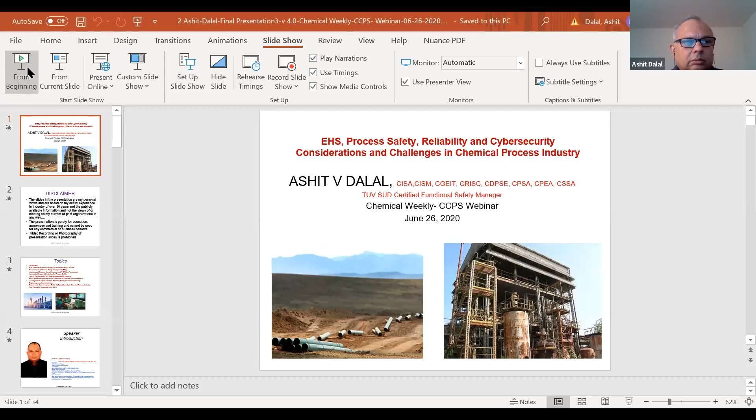I'm very delighted to present this for one reason, basically it's a kind of something we are giving back to the society and industry. And also I'm getting together with my old friends and colleagues and classmates. Deepak, Anil, myself are from the same batch, and Ravi was a little junior, but he's way ahead when it comes to business acumen and other things.

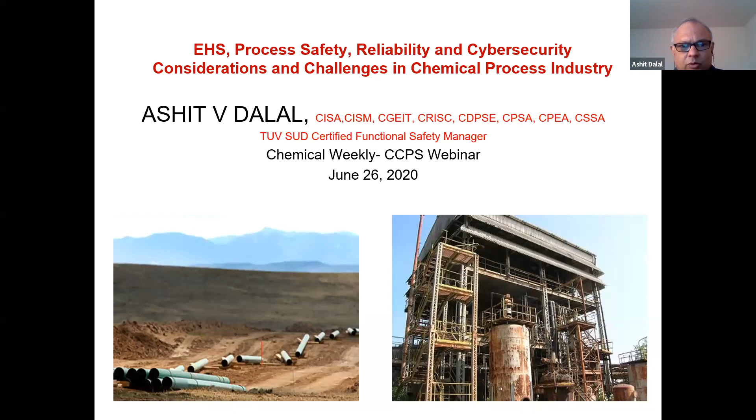So thank you nevertheless. This is a very critical and important topic. So we decided that we would give whatever we know and share our knowledge and experience, and at the same time learn from you guys, because there are a lot of people who have joined with a tremendous amount of experience. So I'm just going to go quickly and talk about some of the important aspects.

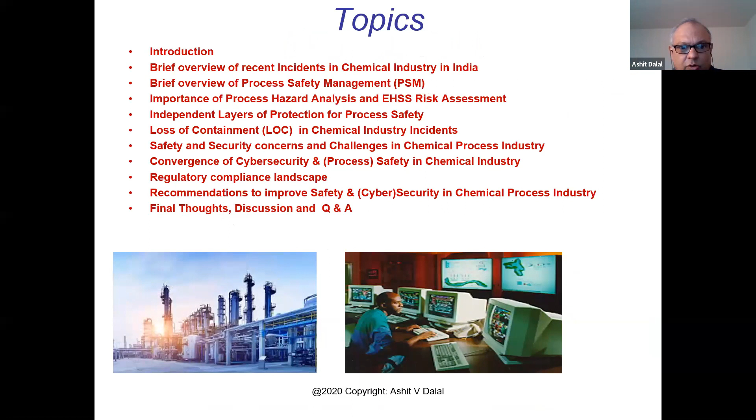So this is a little bit of my introduction, which you already know. I have a degree in chemical engineering and an MBA. I'm a gold medalist from Jamnalal Bajaj, and all those certifications you're seeing are all active. Almost 25, 30 years in industry, as Ravi has already said.

So when we started this, I think, sorry, I'll go back. This is Bhopal. Everyone knows what happened on the fateful night of December 3rd, 1984. Largest environmental tragedy in the history of the chemical industry, and it impacted so many people. 2,800 people died, with permanent damage to several others, and just $350 million was the kind of damage estimated at that time. In today's value, it would be much more.

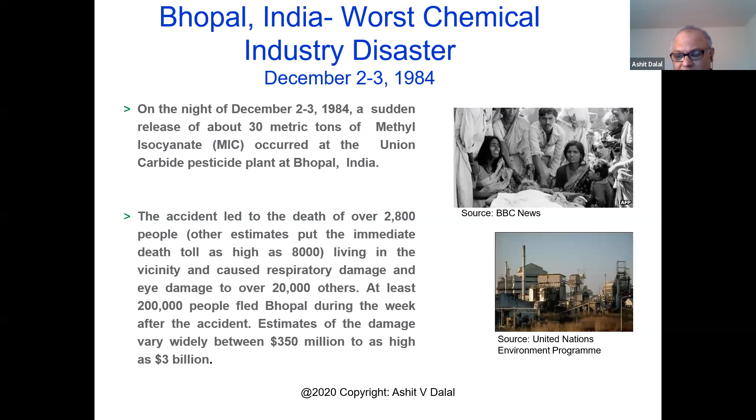But this actually set the ball rolling, and it initiated a lot of other things in terms of PSM. So why we decided to go with this particular webinar today is the series of accidents that have happened in the last 3 or 4 months since COVID set in. Most of you are aware, and these are specific to India. I have not taken any of the US accidents.

So these are basically: one, LG Chemicals, everyone knows what happened, 11 people died. PNN Life Sciences, which is Harsha Organics — they had given this on lease to a company based in Hyderabad, a Piperazine Recovery Unit — 3 employees died due to the blast. Then you have Khanda Biofuels, again in Telangana, same thing, 2 workers killed. In Kurkumbh, Pune, which is Kusum Chemicals, there was a fire incident, no casualty, but damage to equipment and assets.

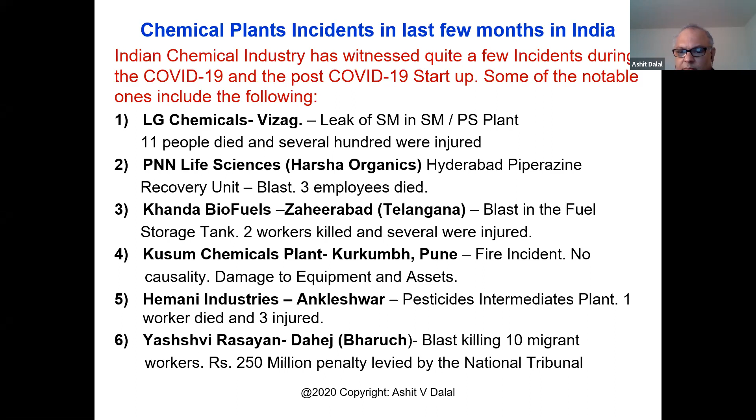Hemani Industries, a pesticide intermediate plant — a worker died and 3 got injured. And again in Bharuch, you had the blast killing 10 migrant workers, and I was told that about 250 million rupees penalty was levied by the National Tribunal. So this has triggered — we need to think about why this is happening.

So these are some of the factors that I have analyzed based on those accidents, and most of them are common. Even in the US we have seen: untrained casual labor, lack of communication and training on safety policies and procedures, lack of process safety protocols. Most importantly, in none of those places — more so in the small and medium scale — is there a clear presence of proper EHS and security risk assessment before and after starting the plant or during lockdown.

There is no guidance in taking inventory of storage material in the pipeline, reactors, equipment, storage, maintenance and integrity check of the equipment, ICS, PLC systems, piping systems, because if the plant is shut down for 2 or 3 months, this is something which you need to do.

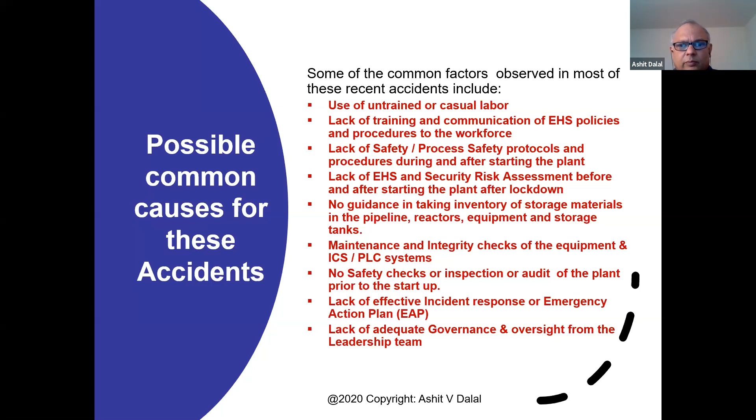That is one of the reasons why the trapped styrene in the storage tank at the LG Chemicals plant possibly triggered that explosion. The lack of incident response and emergency action plan at the individual site, facility, or industry level, especially for small and medium scale operations, could be one reason. Most important, there is a lack of governance and oversight from the leadership team, which is one of the most critical root causes for this accident.

This is one of my favorite books, called the HSE Executive Book of 2003, which comes from the UK, and I took this chart from that. If you see the pie chart, which is a little hazy, almost 60% of incidents come from poor specifications, design, and implementation. The balance comes from commissioning, installation, and some other factors.

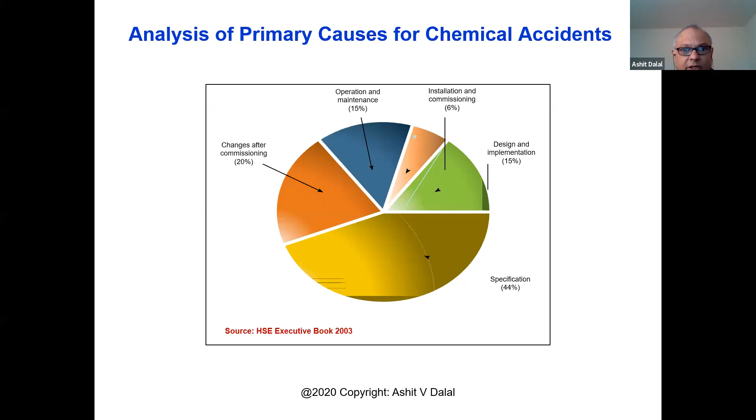So at the design stage, you have to incorporate many other factors, including training, EHS, and process hazard analysis, etc. This goes back almost 17 or 18 years, but it still holds true today. If you analyze most accidents, this could be one of the major things you might want to see.

As I said, process safety management, PSM, came into being because of the Bhopal incident. OSHA in the United States, the federal government agency, in 1992 came out with this legislation which impacts all hazardous industries. Section 1910.119, or 29 CFR 1910 as we call it, is the key federal legislation where the entire responsibility for management of hazardous industries is vested with senior management, and they are held accountable.

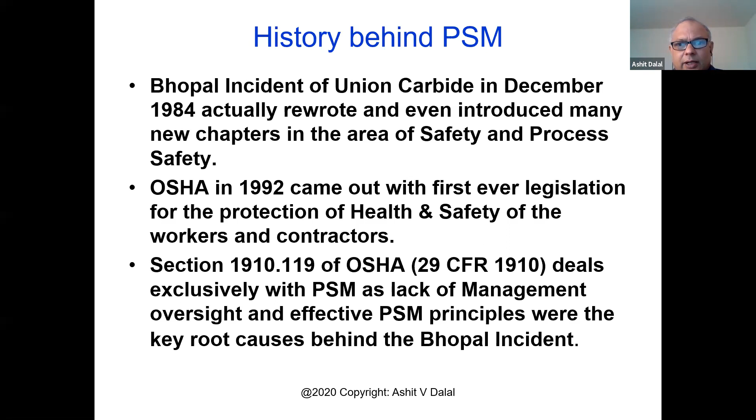So this is a quick definition: any activity which involves highly hazardous chemicals, including use, storage, manufacturing, etc., or on-site movement of such chemicals, or a combination of these activities, is all considered a single process.

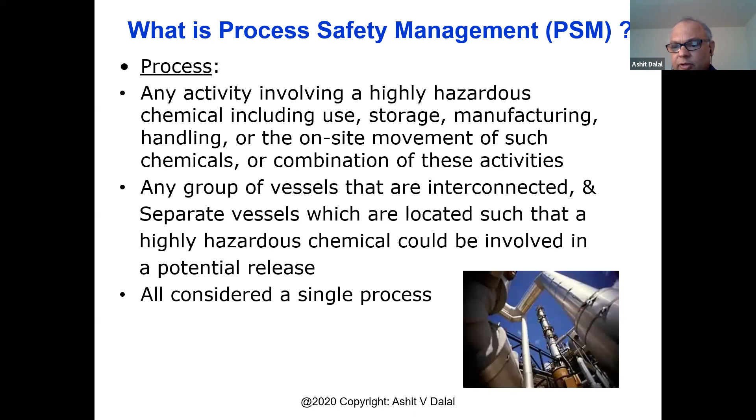Now, many times in complex chemical manufacturing plants, and I've seen this often during my auditing and consulting work, many chemical facilities may not have the whole facility under PSM, but the section which deals with hazardous chemicals such as chlorine or ethylene oxide would basically be part of the PSM.

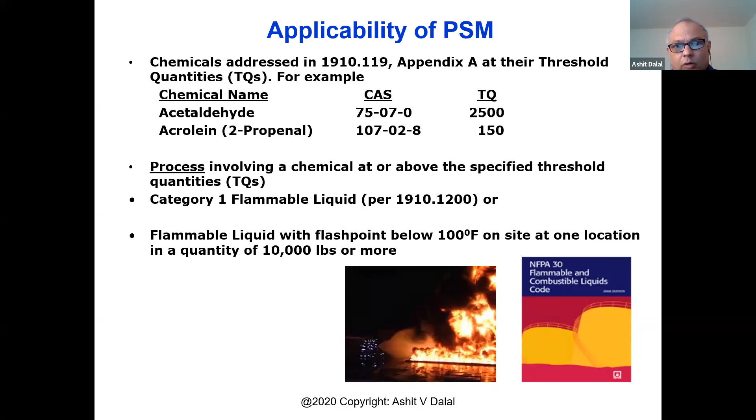Some of the triggers here determine whom the PSM would apply to. Most of you know about it, but the general rule of thumb is that if any flammable liquid with a flash point below 100 degrees Fahrenheit is on site at one location, and it stores more than 10,000 pounds, or roughly 5,000 kilograms or 5 tons or more, it would be impacted or covered under process safety management.

Now, the importance of PSM, as I mentioned, is that whether small or large doesn't matter. Though PSM per se, OSHA per se, may not be applicable in India, the process safety management principles do apply. I would always insist, regardless of a facility's chemicals or size, whether it has 5 people or 500 people, you want to make sure you have a proper process safety management program in place to ensure that safety and environmental health safety protocols are properly implemented and regularly reviewed and audited.

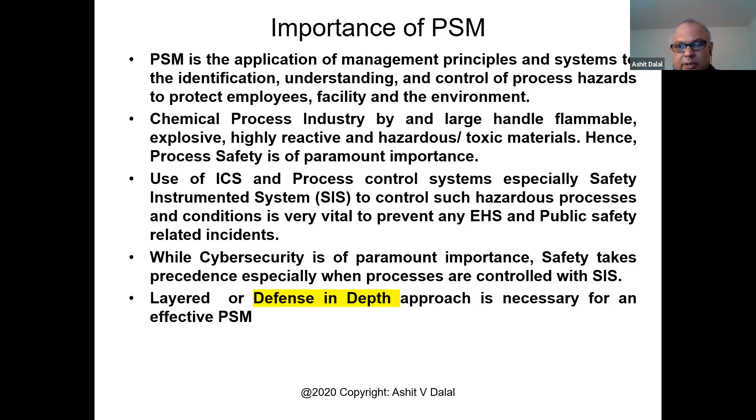There are 14 elements of PSM, which you'll find if you go to OSHA legislation 1910. Some of them I have highlighted in red, and there's a reason behind it: later in the presentation, when I map this with cybersecurity, some of these elements go hand in hand with cybersecurity related concerns for the chemical process industry.

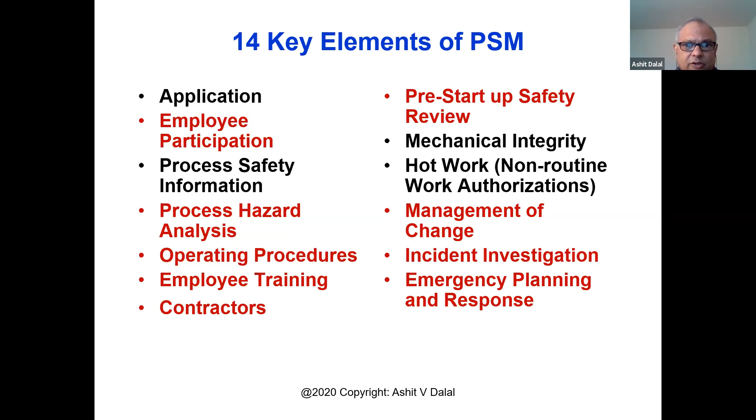I think everyone knows this, most companies, whether they do it or not is really a question mark, but this is the starting point. You have to carry out, based on asset value etc., what is needed.

You need to carry out what is called risk assessment, which is a classic case of the old approach where you have the frequency or probability of occurrence and also how much impact it would create, or the consequences. If you see on the right hand side, anything serious or high impacting, you need to take care of very meticulously. PSM would focus around those areas where a facility has hazards from a risk perspective that need to be addressed.

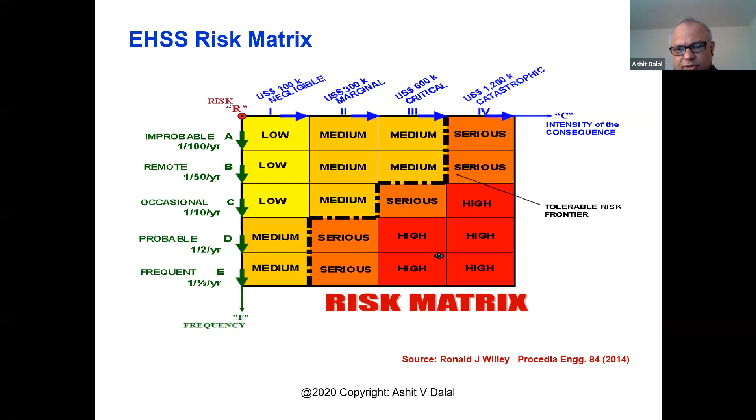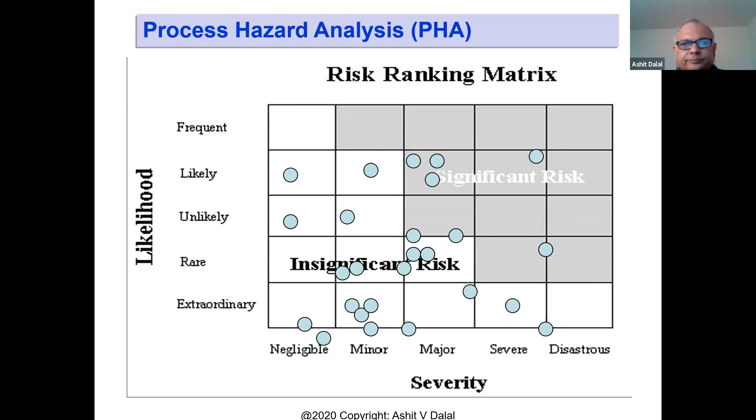It is very similar in the PSM. The starting point is process hazard analysis, PHA, where a variety of methods can be used, HAZOP studies and stuff like that. It's the same thing where you have a risk ranking matrix. That would be the starting point. That would give you an idea what would be the risk from EHS perspective, and the same will be extended to cybersecurity as well.

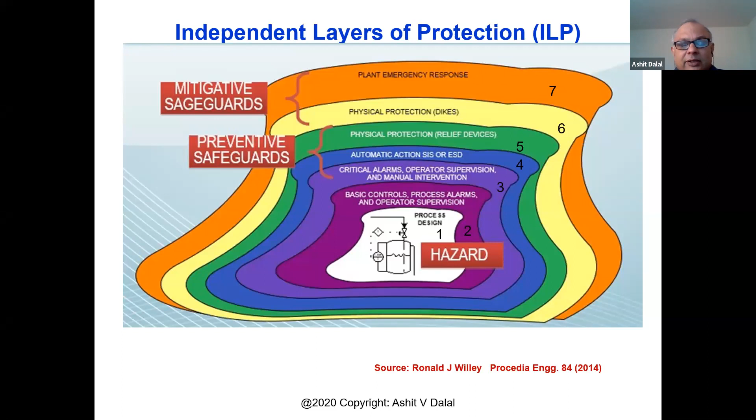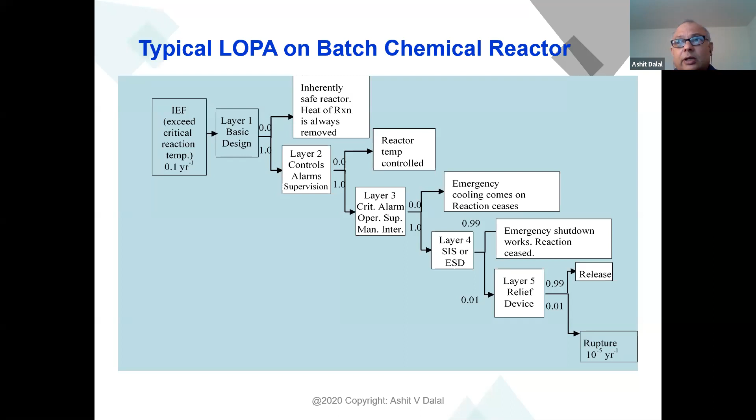Now, this is the typical LOPA, layer of protection analysis, I did for the batch chemical reactor. What I have done is translated the previous slide into those layers which you have seen, layer 1, layer 2, layer 3, etc. And finally, after layer 5 and the relief valve device, if it gives away, there will be a release; there is a probability if it ruptures, then what would happen. And really, if the release happens at a large scale, then you have to invoke your emergency action plan.

Now, one of the most important things, both from the environmental health and safety perspective, is what is called the loss of containment. And this is a very critical aspect to be considered during process design, engineering, and operation and maintenance phases of any chemical plant, whether it's a small size or a big one. And this includes pharmaceuticals and other industries as well, where a lot of hazardous solvents and gases are used. Some of the key factors responsible for loss of containment or LOC, please do not mix it with line of control, which we have with our neighbor. This is loss of containment, so it's also called LOC.

So you have inadequate EHS risk assessment, which we talked about. If your equipment is poorly designed; if you see the HSE handbook, which I have said, 60% of that comes from poor specifications and design. Equipment failure due to mechanical integrity issues, inadequate preventive or regular maintenance, not doing proper reliability analysis, and also management of change. Human error and negligence, which we have seen in most of the incidents that I've talked about in the last 4 or 5 months, was one of the major things. Lack of emergency action plan and incident response program. Classic case was Bhopal, classic case was LG, and so many other incidents that we have seen.

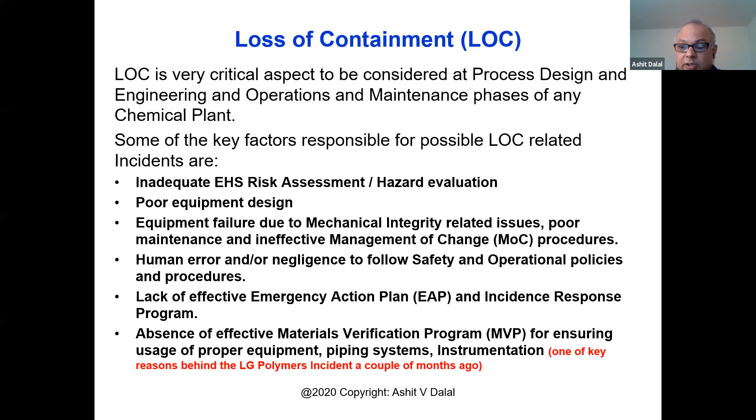And then most importantly, the absence of an effective material verification program or MVP for ensuring the proper usage of equipment, piping system, and instrumentation. And you must know what the inventory is, because if the plant is shut down for 3 months, and you have, for example, styrene monomer or some chlorine or any such hazardous chemical which is entrapped, and you suddenly loosen the valve for maintenance before you start your plant, or replace it, and proper MVP is not done, then that can lead to an environmental or health and safety disaster.

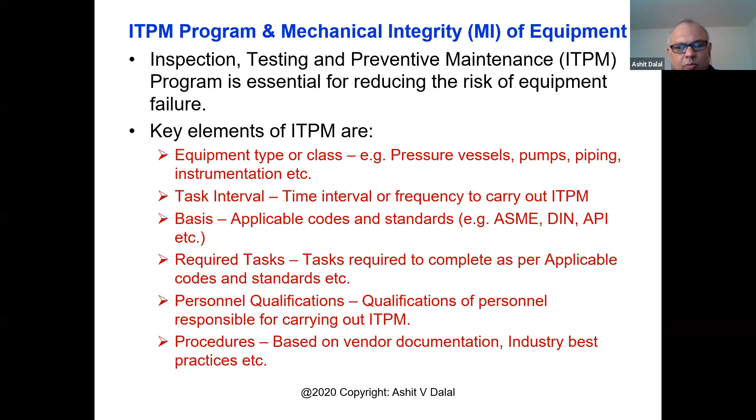So this takes us to what is called the mechanical integrity of the equipment, and we call it an inspection, testing, and preventive maintenance program. ITPM is one of the major areas of very important consideration from a process safety perspective. There you have to consider every equipment type-wise, class-wise, what tasks they perform, what the basis is, like applicable codes and standards, ASME, DIN, API, etc. All required tasks are to be completed as per the requirements, personnel qualifications and procedures.

So this takes us now to cybersecurity and safety. I have about 10 minutes. I'll try and go through this.

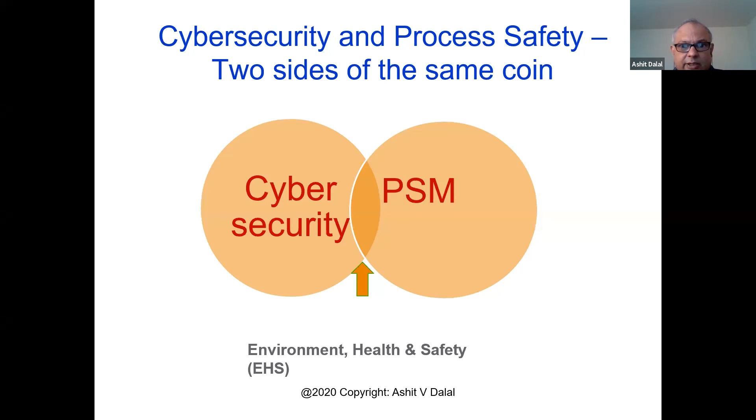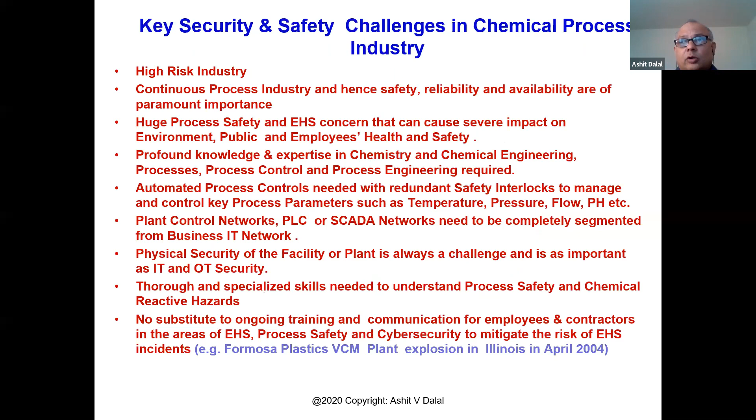One of the things I have found here in the US is that the chemical industry is part of critical infrastructure, as announced by President Obama back in 2012, where cybersecurity is considered very critical for all 16 infrastructure industries, which include chemicals, petrochemicals, oil and gas, energy, etc. I mapped cybersecurity-related issues with PSM, and came out with a strategy for the chemical industry, because safety and security have to go hand in hand. If you have an EHS or safety concern, there will be some kind of cybersecurity or security concern that you cannot neglect. This slide talks about it. I'll go over it quickly.

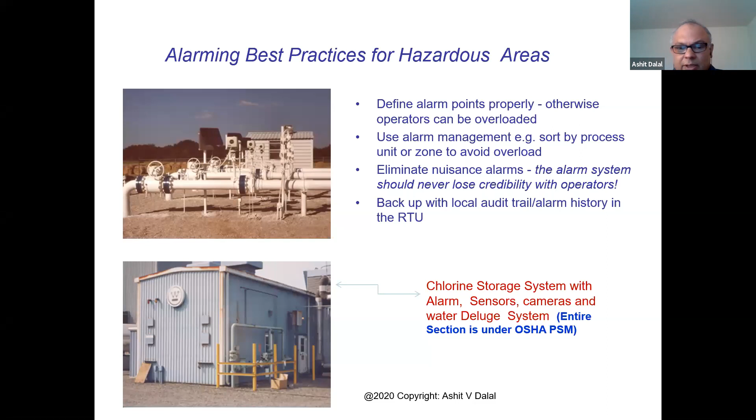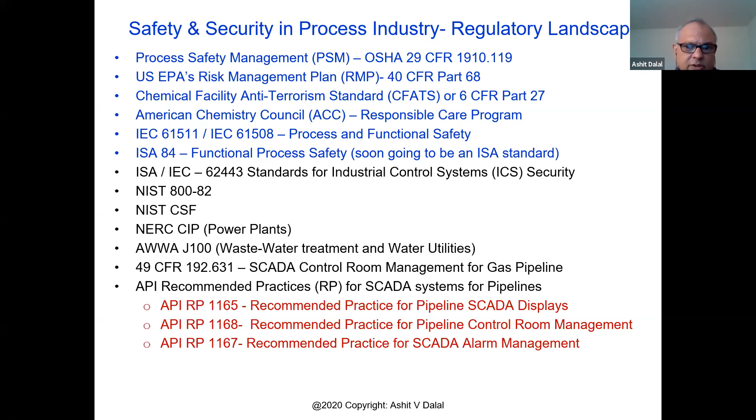After that, Schneider Electric made the necessary changes, making sure that you cannot put that switch in normal mode or program mode. It also has to be secured physically. So this has become a big case study. This was one of the first instances where a safety instrumented system was targeted to create a huge EHS-related issue.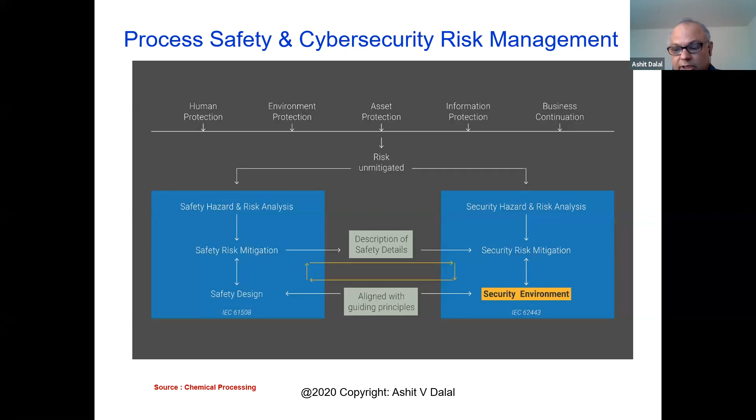Second thing is, you need to segment your industrial network from the IT network, making sure that you are able to have unidirectional flow. Remote access to the industrial control system network from the enterprise IT network should be restricted or not allowed. Actually, in the nuclear industry, that is completely not allowed, with the air gap and also 10 CFR legislation in the US.

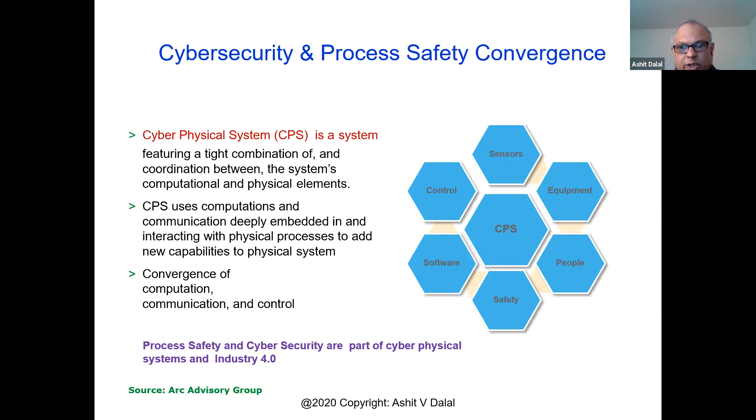And I really like this slide, because this is a cyber physical system where we try to marry cybersecurity and process safety convergence, where software, safety, people, equipment, all the communication controls, etc., are integrated cohesively so that they walk and work together. These are some of the best practices which I consider as enhancing your safety and security in the chemical industry.

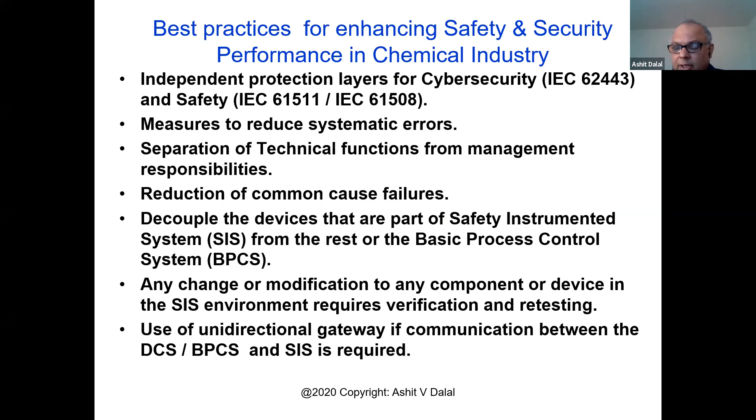Most important, you want to have a layer of defense, either from cybersecurity or on PSM. We have seen independent layers of protection. You must develop what is called the necessary integrity plan, necessary governance from the senior management, looking at the common cause failures and trying to reduce them, and also making sure that any changes you make go through a proper change management process, both at the safety level and the security level.

These are my 7 commandments for an effective process safety and cybersecurity integration program. And this is applicable to any chemical plant. Don't tell me that if you are from a small scale or medium scale, this would not apply. This would apply to as much as DuPont to a small company in Ankleshwar or in Telangana district. It doesn't matter. It should be very strictly followed. And these are the 7 best commandments, I would say.

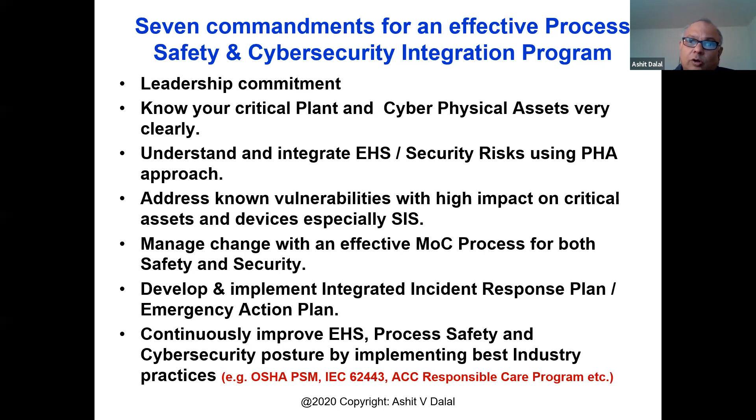Most important thing, and I have put that at the top, is the leadership commitment and the governance, and also continuously reviewing the EHS and the security posture. These are some of the most important things you want to do. These are my final thoughts. Process industry executives should take the responsibility and accountability, and adopt the risk-based approach towards EHS. And Anil is going to talk about pre-startup reviews and other things. And one of the most important things is there has to be continuous awareness, training, and communication on EHS aspects, and making sure that everyone works hand in hand as a team.

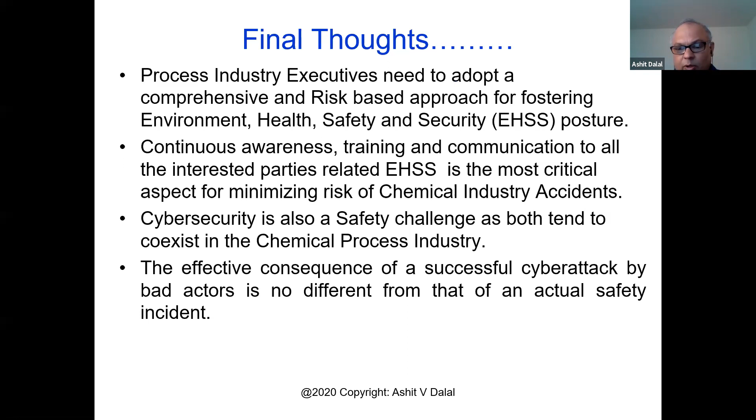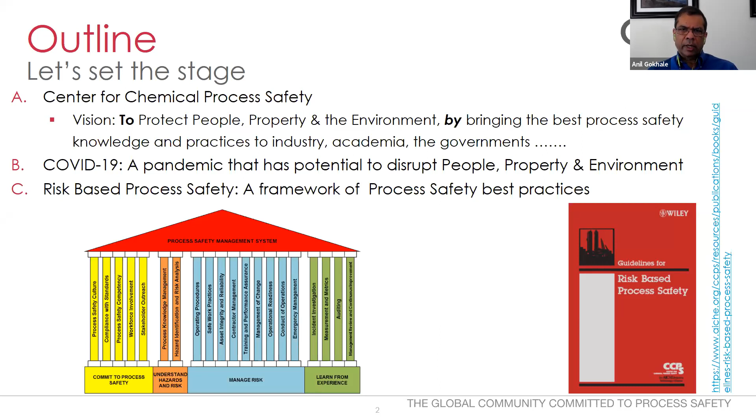RBPS is based on 4 foundation pillars and 20 elements, and I will describe to you a little bit about those, just a handful of those elements, in a few minutes. So what is CCPS?

Next, we have a list of companies that are headquartered in India and are CCPS members. Some of these names are well known in India and around the globe. Some of them are perhaps not as well known, but they are all member companies and all active in CCPS processes.

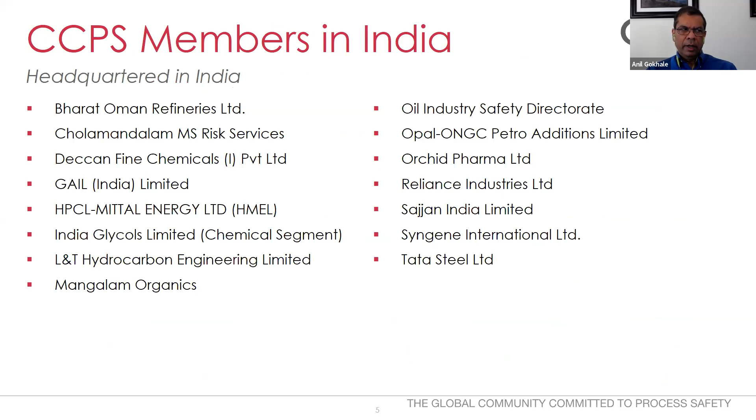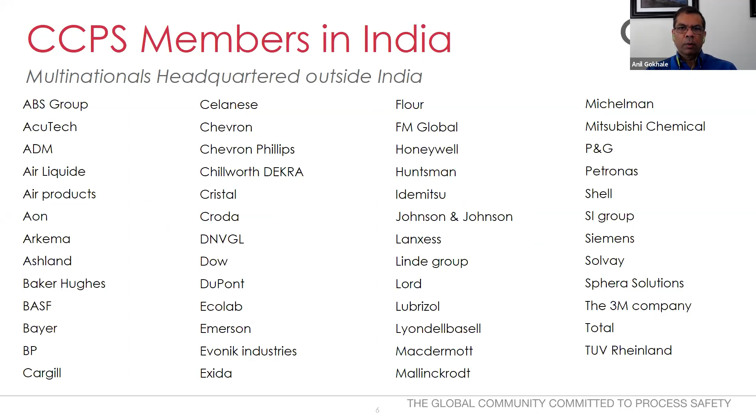I quickly want to show you another list of companies who are headquartered outside of India but also have a strong presence or operations in India, just to give you a heads up that we do have a global support structure in place.

Before I dive into the details, here is why I think CCPS participation is so important. One of the very important aspects of CCPS membership is a belief that sharing knowledge benefits everyone. And like I said, that's why CCPS, in my role, is here to provide some guidance.

This includes sharing best practices about process safety, as well as details of what happened behind incidents as and when they happen. You may think this is contrary to many cultures around the world where hiding undesirable events is pretty much the norm, but even in those countries, CCPS members have very often shared learnings from others, as well as letting others learn from their own mistakes.

And this benefits everyone, because if you have an attitude of learning from others' mistakes, you tend not to repeat those mistakes. In other words, process safety is not a competitive issue. So that is why sharing is very important.

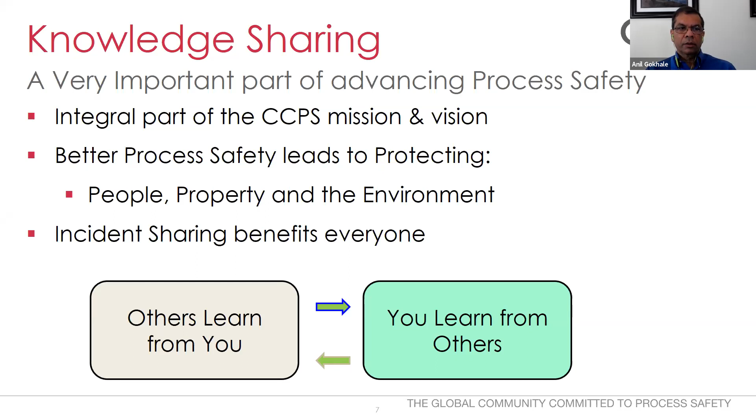So what is CCPS offering the industry and its members at this time? I have listed the CCPS website, particularly the monograph page here at the top of this slide. And like Ashit said, you will have access to these slides very shortly after this, so don't try to write it down in a hurry.

To tackle COVID-19, we published several documents already, and on this webpage there are several documents. I just want to point you to the top 3 here, and I will cover all 3 of them in my presentation in the next few minutes.

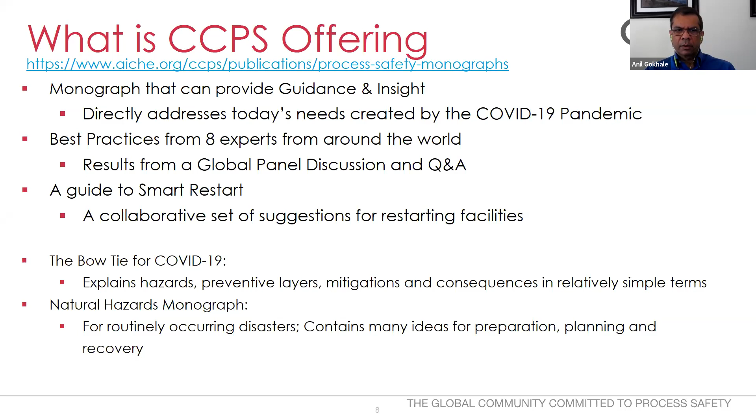Going to the first one, which is the CCPS monograph on process safety under the umbrella of COVID-19. When this idea germinated, we brought in several experts from the industry to ask them what they are doing and what they are actually going to do and share their expertise. Some of their names are in the acknowledgement section of this particular document.

This monograph uses RBPS, or risk-based process safety, as its backbone because those principles are applicable at all times, good times and difficult times. We firmly believe that, and hence the reason for using RBPS. And all hazards are not equal and risks are not equal. That is why you have to manage your resources selectively wherever there is highest risk and so on.

As we continue to operate the plants, the need for managing process safety is not really any less critical. Perhaps it's even more so, as has been made obvious by a list of incidents that Ashit mentioned a few minutes ago. There has been major impact. Why is that? Because there has been a major impact on resources, on everyone, and this includes human resources, material, equipment, supply chain, financial resources, and so on. And they all affect process safety. That is why having the discipline of risk-based process safety is very valuable to maintain.

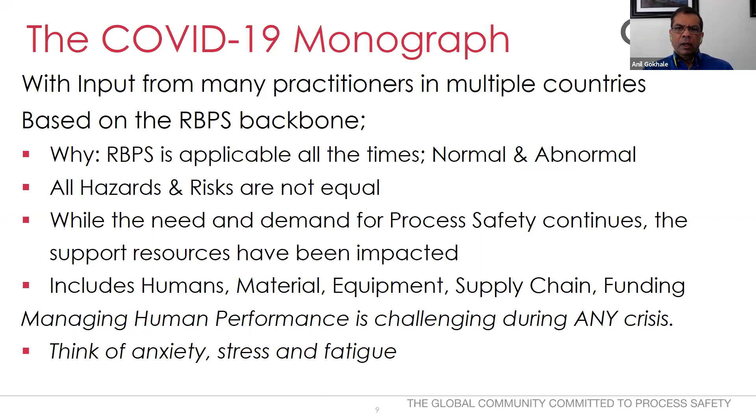So please do read it. It is available to everyone. You can access it on the CCPS website. The one on the left is what I just talked about. It contains all the guidance on all the 20 elements of process safety. The one on the right is a little bit different.

On May 4th, we convened a panel of safety experts from 8 countries around the globe in 4 continents, including India. We had a presentation there. And they individually discussed their own best practices and challenges as they are facing now. What have they done? What are they doing? What do they intend to do? And so on. And that discussion covered a lot of different topics on process safety.

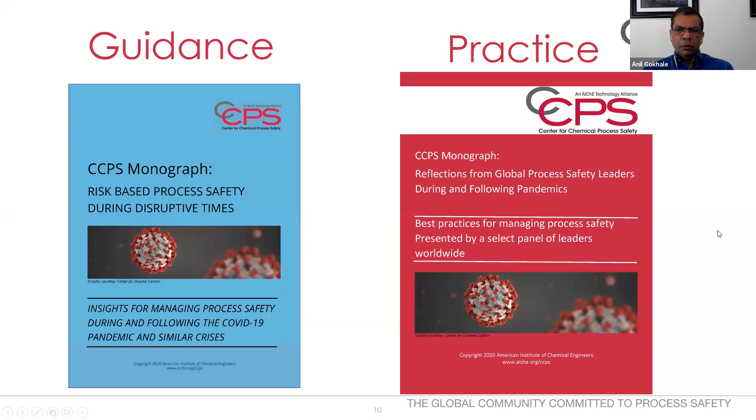This was, again, a global audience, and we had invited them to ask questions and also vote on what their priorities were. All that is recorded in this document on the right side that I call practice, as in actual practice of process safety under COVID-19. And you also have access to that on the CCPS website. The recording is in the members area, but the full transcript is available to anybody who is interested. So please do take a look and use it freely for your own benefit.

Like I said, there are 20 topics in RBPS, but today we have limited time, so I will address only a few of them. I will start with operational readiness and PSSR, briefly touch on the management of organizational change, and then go on to discuss process safety culture as well as process safety leadership, because I believe those are the top 3 critical topics from the industry's perspective, especially that in India.

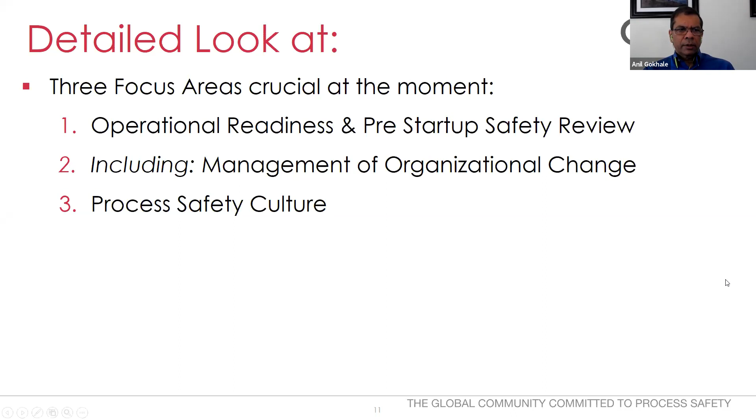Let me start with operational readiness. As you know, this is going back again to 1986. As you know, some of the world's smartest and best engineers work at NASA. But what happened in 1986 is a big puzzle, perhaps, considering that in mind. Challenger blew up shortly after the launch, and there was a fairly detailed, extensive study done on what were the root causes of that.

I just want to point out one of those root causes. Thiokol, the manufacturer of the O-rings that were the primary failure point, had specified that the operating temperature must be above 53 degrees Fahrenheit at launch time. Actual temperature was only 36. So why did the launch go ahead? Was there pressure to bypass the safety concern and still go ahead to launch? What do you think was the operational readiness of all the systems when the launch sequence was started?

Was there non-technical pressure by the political as well as senior management to just go ahead and do it? NASA had a large success before this accident. So was there, you think, an attitude that was built because of that - nothing happens to us? Yeah, or in Hindi, you can say, kuch nahi hota hai, just go ahead. All of the above actually is true.

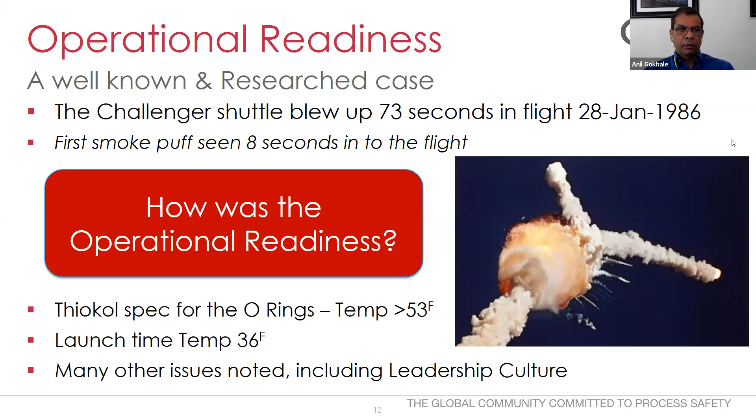Why is that? Because it has been well documented that a significant number of incidents happen during startup. Things are very different during startup compared to normal operation, and that is part of the reason startup times are a lot more difficult.

We are actually in the process of publishing a book on transition times, process safety during transition times, which includes both startup and shutdown. It should come out sometime in the fourth quarter of this calendar year. It describes significant guidelines on what to do and what not to do during this time frame.

If your plant, facility, or process unit was shut down because of COVID-19, this is very critical to understand. Many facilities had stay-home orders or lockdowns, but even if you didn't shut down in a hurry, it is still critical that the startup plan you may have is reviewed thoroughly and updated to understand the critical needs, because they are different today than on a routine startup, both from equipment as well as staffing perspective.

Things have changed, and you may not have the full complement of all your people or contractor personnel available today that you did in the past.

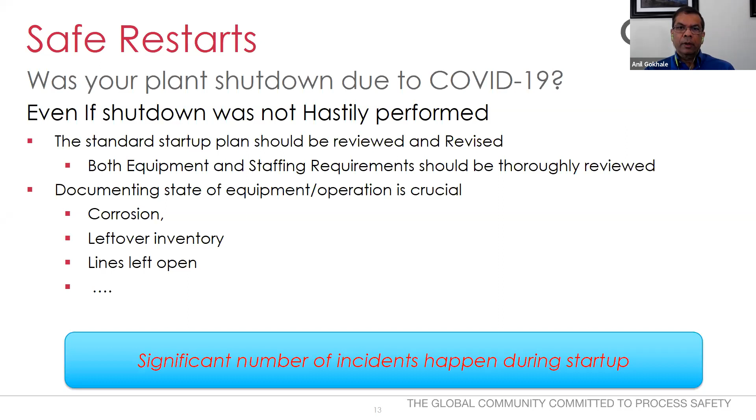So here are some pointers, and this list is not complete and certainly not exhaustive. Each facility must have its own list. There are some items everybody should look into, obviously, and for example, when you are idle, do you try to take advantage of the time to train your staff?

What was the last time they actually went through a startup process? Because for many of the continuous operating processes, you may not have had a startup in 2, 3, 4 years. Have they forgotten how to start up the process? Perhaps they have. So retraining at this juncture before you attempt to restart is very critical.

And that might lead you to think about a variety of different things, which may end up being some instrumentation, which is important during startup and perhaps critical, but during normal operation, perhaps not necessary or not as valuable anymore. And if you didn't pay attention and fix those things if they were not working, then you are asking for trouble as you start up the plant again.

The example of the BP Texas City incident comes to mind along this line.

Also, equipment lineup may be different for startup, and if you have not checked that thoroughly, it's critical. There is a process called walking the line, and make sure you can do that and be fully confident that you have the proper equipment lineup in place before you get into the startup process.

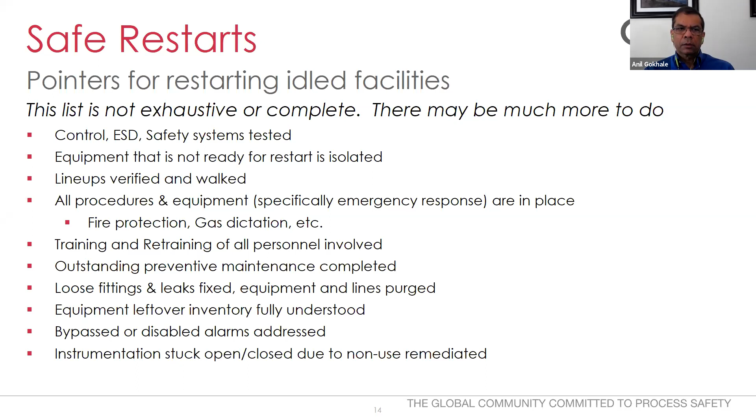I want to try and show you a couple of different resources that will allow you to do a better job of understanding some of the risks and perhaps the mitigations also.

I believe in today's climate, that is a very critical book. And if you don't have it already, for those of you embedded in process safety, this is a must-read document.

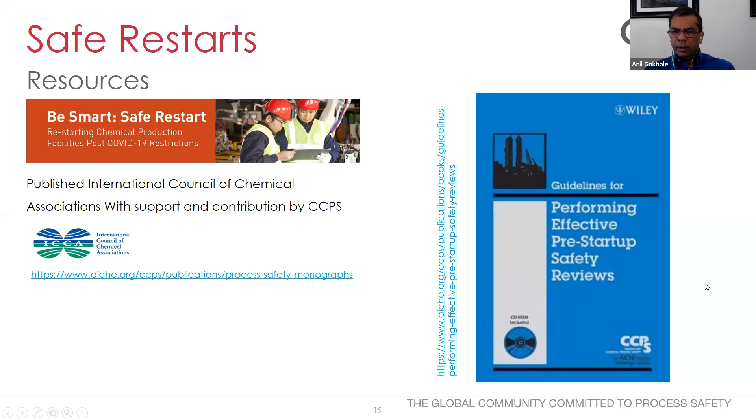Let me move on quickly. Time-wise, I think we are doing okay.

And talk about management of change, and actually focus a little bit more on management of organizational change, which is critically and integrally tied with the MOC protocol.

When the plants have to operate with reduced staff, it means some people have to take new or additional responsibilities. This can lead to prioritizing things because your number of hours is still the same and you're taking on more work. Some things will just not get done, and people have to decide what is more important and what is not, and that can cause some problems.

For example, you may have something written down in a procedure, but everything that is in a procedure may not actually happen, and that's a risk you take that can lead to significant problems. So reduced staff can lead directly to some issues you need to be aware of.

In one actual plant, let me give you an example. They were trying to be careful about interactions between shifts, and to avoid transmission of contagion, they decided to have a cleaning crew go in and clean all the DCS equipment and keyboards between operator changes, to avoid contamination. At one time, a sequence of buttons got pressed on the DCS keyboard—this is a real life story that happened very recently. A unique combination of keys got pressed by the cleaning crew, and a significant change in a process set point was put in.

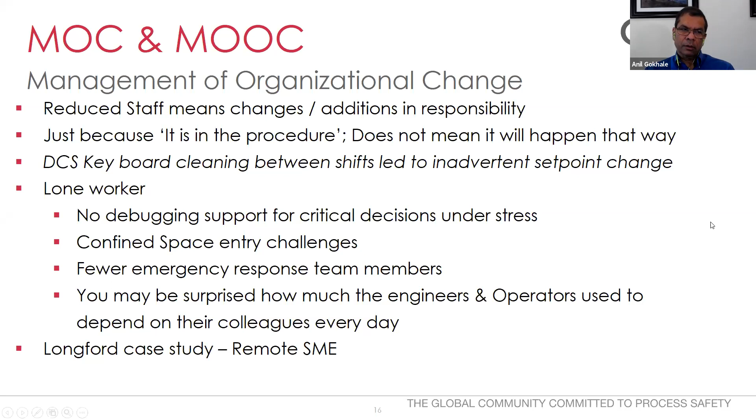For managing organizational change, here are some examples to consider. You should have a protocol in place that minimizes contact, obviously because of the contagion, but still figure out a way to have critical communication just like before, without any reduction in its intensity. What are the risks, and how are they mitigated? If you don't have critical communication just as before, that's something to be thought about and planned for well ahead of time.

Some companies, for example, have suspended shift change handover meetings between the team of operators and engineers, so that the teams are kept separate and you don't have cross-contamination. This can lead to missing information transfer on some key items.

In one site in Europe, just very recently, there was an ongoing repair in one facility that was not finished by the end of the shift. After the shift change, a new person came on who was not aware that the particular equipment was under repair, and he tried to restart it. What happened was an accident, and he was injured.

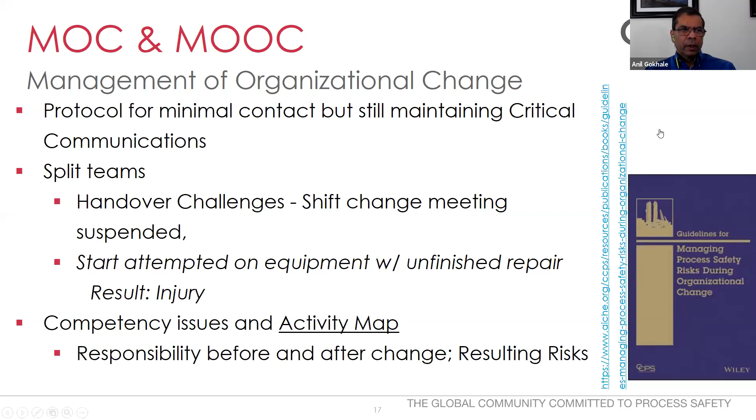Moving on, I want to switch to the third topic I mentioned, which is process safety leadership and process safety culture. Leadership is critical at all levels, not just the CEO or top of the organization. Leading is what good leaders actually do, and that's very different from managing. Leading is not the same as managing. Every organization, and every individual, should already know what their role is as a leader and execute it, especially now in the time of COVID.

In the situation we are in, people are very anxious and they want to hear from good leaders a whole lot more than usual. They may not speak up unless they feel a kinship with their leaders. So what some leaders are doing is having video calls, group meetings, and town halls as some good examples.

Some CEOs are actually sending out small but very effective messages to their whole company almost every day, and the key word there is effective. You don't want to distract the teams with messages that don't add anything to their morale or work practices. Some people have their staff quarantined, and those leaders are checking on their direct staff daily on how they are doing, looking after their families' welfare and so on, and that builds a lot of trust in the management of the company.

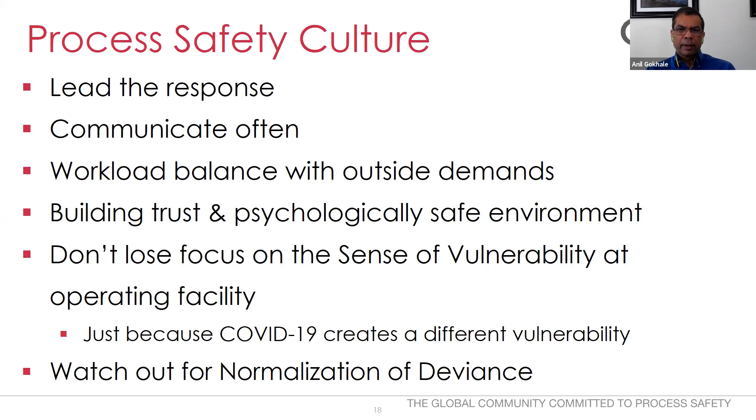So people are going to ask me, I'm sure, and they already have, how do you measure culture? We can measure production, we can measure temperature, but what's this culture? How do you measure it? It's a very intangible thing. And I want to give you a simple tool for you to see how well committed your culture is from a process safety perspective.

If you have a chance to take a look at this, download this file, and do your own assessment as to how some of these things are handled. For example, are they done always, sometimes, once in a while, not really. And that spreadsheet will actually score your response. You don't have to share it with anybody. It's just for you.

So take a look at that and see what you think your process safety culture looks like, and it will make you either feel very good about it, or it will open your eyes and point you to things that really need a lot of attention. One way or the other, it's a good practice to take a look at and decide where you stand on your own. This is a test for yourself, not for showing it to anybody.

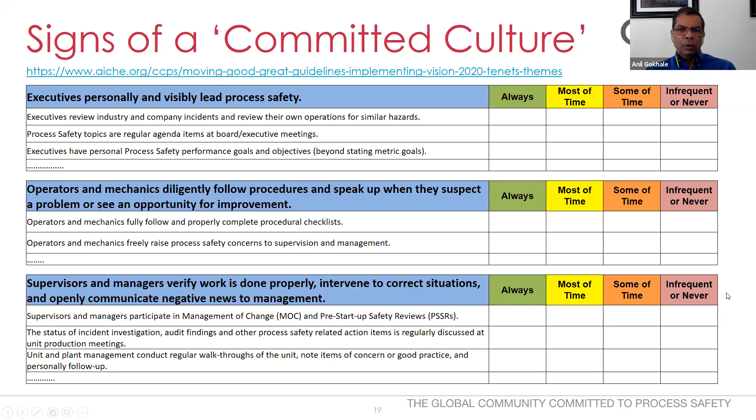And some examples may be when you have incidents that are happening, like I discussed, like Rashid showed a long list of them that have happened in India. There are potentially lessons that can be learned by everybody as to what went wrong and how that can affect your organization. So it's an interesting tool to look at and do your own scoring when time permits.

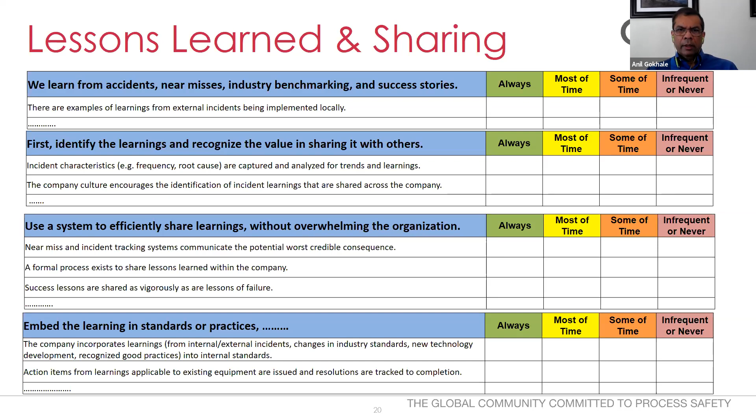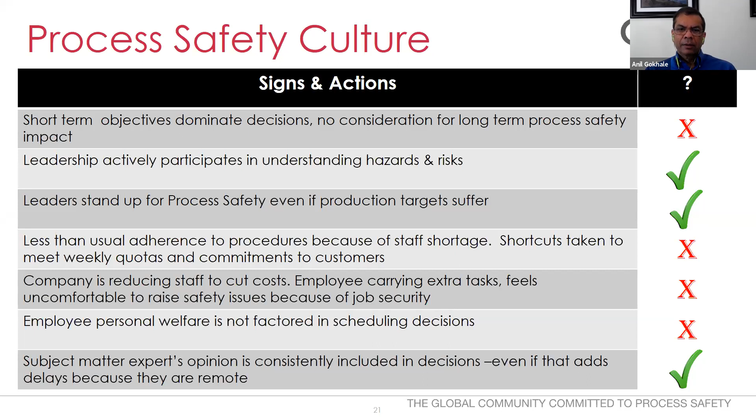Now let's look at one more. Number 5. Companies are reducing staff and employees are afraid for job security, so they will not raise process safety concerns that they see. This is a sign of a very weak process safety culture, and so on. So I'll let you read the others as time permits, because we want to save some time for questions and answers here. But I want to give you a test.

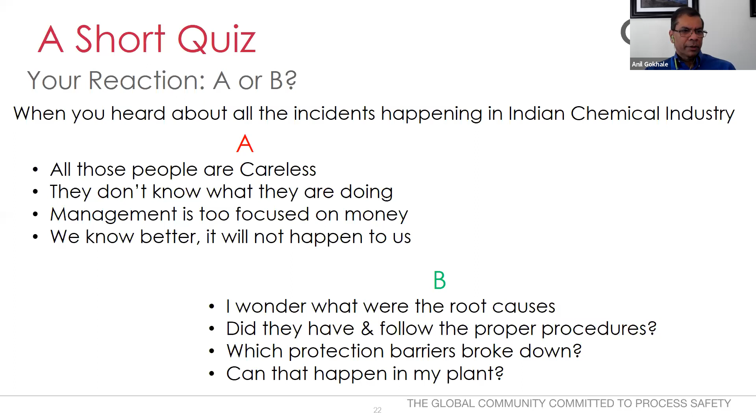The CCPS website I have referred to will tell you how to acquire these books. Those of you who actually work for CCPS member companies already have access to them, because free copies were sent to you as part of your membership benefit. So find out who is your CCPS representative, and they will have copies of these books available for use by your company. Additional copies always can be had through our publisher.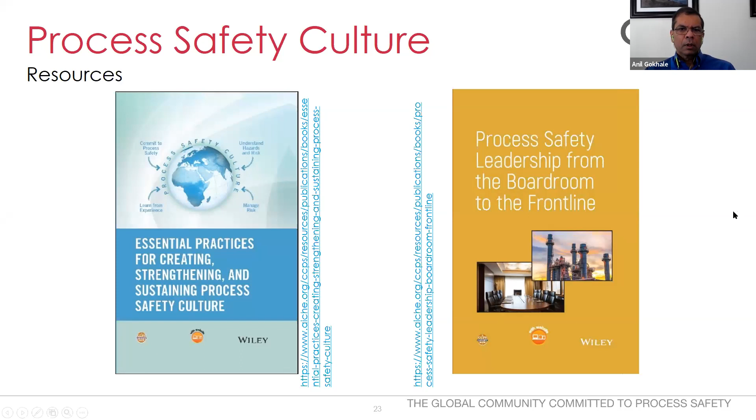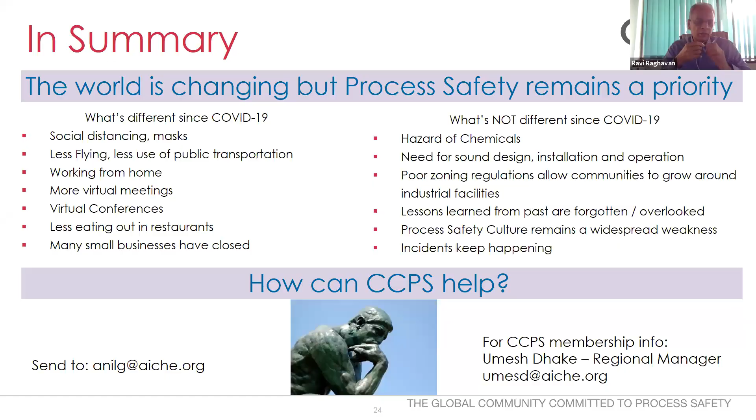Thank you, Anil, for doing an excellent job of giving an overview of the resources available with CCPS, as also sharing your experiences on how the industry can tackle the risks associated with process safety. I think there is a broad understanding in society, at least in the chemical society, that this industry will remain by its intrinsic nature a hazardous one. But it is a question of managing risks. And I think both our speakers today have given a perspective on how that can be done better than we have been doing in the past. They have shared some of their experiences. They have pointed to a lot of resources which are available with them. And I'm sure that all of you will stand to benefit from what is available.

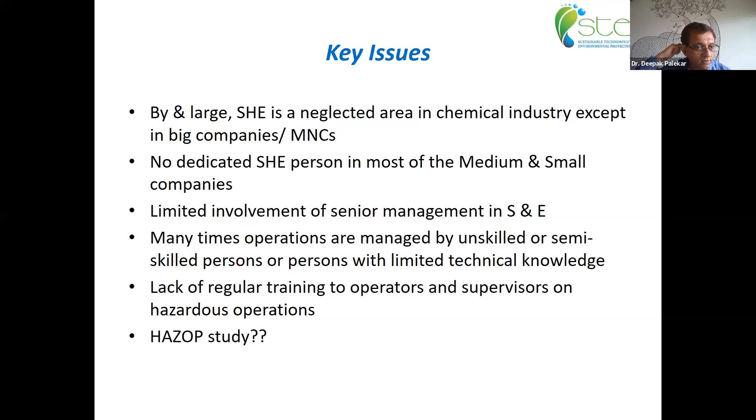Anil, can you change the... Yeah.

And he ultimately ended his answer by saying that we should have safety norms which are like in a nuclear plant. A very, very tall order to start with at present in Indian industry. But I think it's a very, very interesting statement which he has made. And I believe that it should be the objective, but we should really try to improve on the safety norms, need to lay down safety norms properly and implement them as well appropriately.

I believe one way forward is possibly to do some better automation of the operations wherever possible, and employing trained technical persons, especially to operate any hazardous plants or hazardous chemistry. Don't leave it to any unskilled workers. Regular training of employees is another way of ensuring that handling of such hazardous operation is done with lesser risk. I won't say there is no risk, but it could be lesser risk.